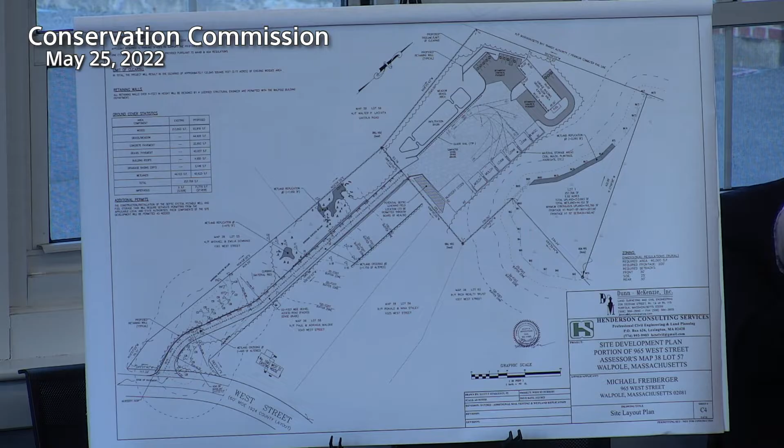We had looked at, as a team, an alternate location, which is a slightly different wetland pocket on the east portion of the site where we aren't really proposing any work. The reason for that was that those grades are much more level. It's easier to be able to lower that grade, but it isn't in the wetland pocket we're altering. And so, as a team over the last week or so and in the coming weeks, we're going to evolve a wetland replication design on the northern end of this second wetland crossing, sort of the shaded area here. This will be extended. We are doing some additional soil testing this Friday, putting in some monitoring wells.

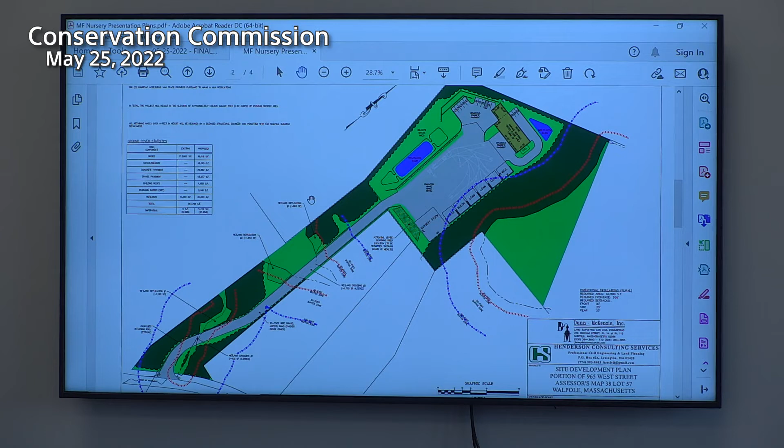It's a unique wetland. Most wetlands are very flat. They collect water. It's sort of the reason that they evolve. This one, there's a unique sort of groundwater breakout occurring to the east of our roadway across an abutting property. And that wetland in and of itself is at about a 5 to 8% grade. So it's a wetland on the side of a hill. Hydrology is a little challenging. We think we figured it out. So that's pretty much all I'll bring up regarding that tonight.

The additional information shown in the plans, things that were either requested under Landis's review or during that first public hearing. We've evolved the erosion control plan. That is sheet C6, I believe, if you want to look at it.

I had a very general site preparation plan. This has some actual sediment basins graded out, shows stockpile areas, a more thorough erosion control line. The following sheet, C7, on that plan set does have details relative to that, actual erosion control specs.

The plans currently do show straw or hay bales. We're going to be changing that to mulch sock, as I hear at the request of the commission, that's your typical request. So that was updated and will be updated on the next plan set.

We have snow storage areas included on the layout in the sheets C5A and 5B, the more detailed grading and utility sheets. We've picked snow storage areas that make sense and that you can viably plow the access road, stockpile that snow, and have it drain as it melts into our stormwater system. So that's on there.

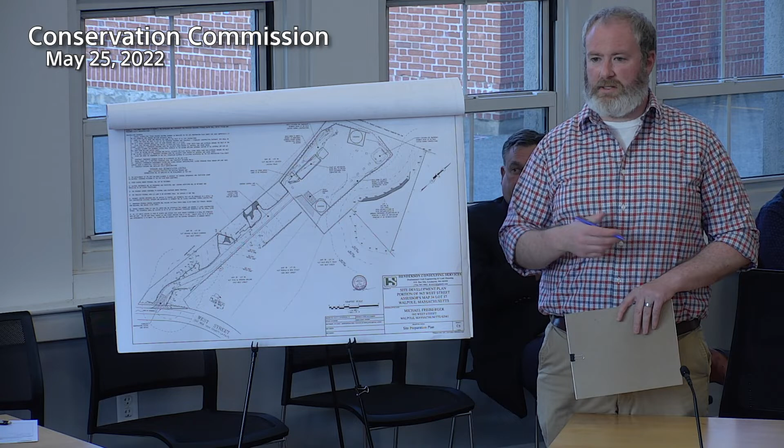At the first hearing, we had done some preliminary soil testing, but nothing extensive that covered every infiltration system. A few weeks ago, I went out with the town engineer, Carl Balduff. We did, I believe, 5 additional test pits. We did in situ percolation tests and hydraulic conductivity tests to support the drainage design. I updated the drainage relative to those. The drainage actually got slightly smaller because the soils were better than what I had assumed in some areas.

Made some adjustments, was able to eliminate one basin. The original plan set had a second one at the northeast corner of the site, off the edge here, but I was able to resize this basin and collect all the runoff into that. So the second basin is no longer there. Allows us to do a little bit less tree clearing, so that was a net benefit. The soil testing info can be found in the existing condition sheet, C3, if anyone's interested in the details of that and the results of those perc tests.

We included a retaining wall specification. So on the plans here, there's a few retaining walls shown, pretty small, all of them non-structural, trying to keep the height at 3 feet or less. But we will be using a large block for those. Redi-Rock is the most common name for that specific block. There's a detail sheet, I believe it's either 9 or 10, that has information for those retaining walls.

Tightened up the limit of clearing line in the tree line. Landis has asked me, on what is hopefully the final set of plans, to put a very clear-cut limit of work line. I will be adding that to the plan. But for reference tonight, where you see the tree line or erosion control line, that's more or less the limit of work. And that's pretty much it. I think those are the crux of most of the updates to the plan.

Yeah, do you want to touch on that quickly? Sure, go ahead. Yeah, so that can be updated. So it's sort of, again, unique. Which drawing is this? C5A, the sheet 5 in the PDF.

So to the bottom of the plan here, to the east of the driveway, you have this second wetland crossing pocket. You'll see the flags start at a stone wall. If you're out on site, there's a very level, clear field off-site to the east here, the rear of these abutting parcels, non-wetland. Wetland's pretty far away, the other pocket. And just at a point at the base of that wall, water perks out. It looks like groundwater breakout, but it's a very unique situation. I've never really seen it before.

That water kind of concentrates in a swale down this hill, and then as that grade starts to get more flat, the water disperses, and it's created that wetland over time. But within the wetland itself, it's on the side of a hill. It's a strange thing. So I had the 4 culverts just in the center of that, knowing the water kind of collects there. We'll go under our new driveway and continue.

Landis brought up a good point that if we could spread that flow out, it's probably more beneficial for the lower end of that BVW, and we're actually going to look at using one of these culverts to feed some of that water into the new replication area. So whereas that same water creates that wetland now, the replication area can benefit from some of that.

So the revised plans will have these 4 barrels spread out, 2 in the middle, 1 off to the side going to our replication area, and the other one just a little bit uphill, so that if there's a significant concentration of water, then that one will flow. So.

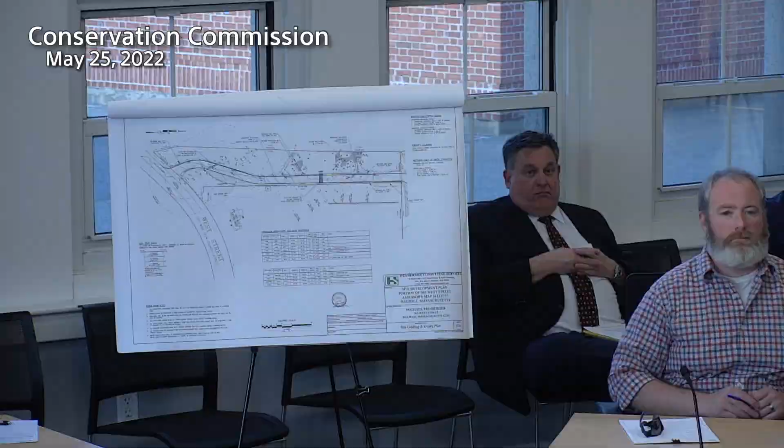Anything else on this? Nope, those are pretty much the comments that I forwarded to the applicant and is in my report. Okay. Dean? No questions. Bailey? No questions.

Doug? One question I have is, in your calculations on the water flows, you have a truck wash area situated right next to the leaching field. Do all the calculations include those? Yeah, so that is a temporary truck washing area. So what will happen in terms of construction sequence, let me get to that plan just so I can.

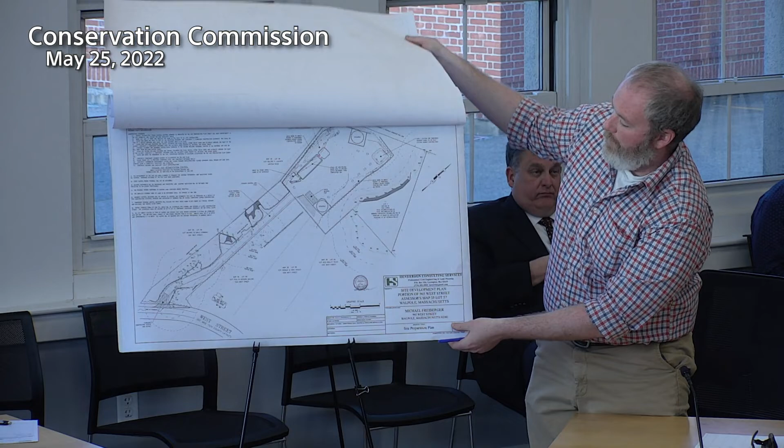That's just during construction? Yeah, so the site preparation plan here, when we start, we're gonna have to start off the road, clear trees, and sort of build this road as a temporary construction road as we go, just to be able to clear and grub trees. So there'll be a truck washing area here temporarily, but once we get to the main upland area, and this is all cleared, this is just when we have trucks that come in bringing material in and out, if we need deliveries of leaching galleys and things like that.

The truck will stage there on the way out, be sprayed down, wash the tires, and then it will drive out so we're not tracking onto West Street. After construction's all done, this goes away, and this just is part of the driveway here. The septic system will be done after that. It's one of the last things we want to do. You don't want much construction equipment meandering around the site.

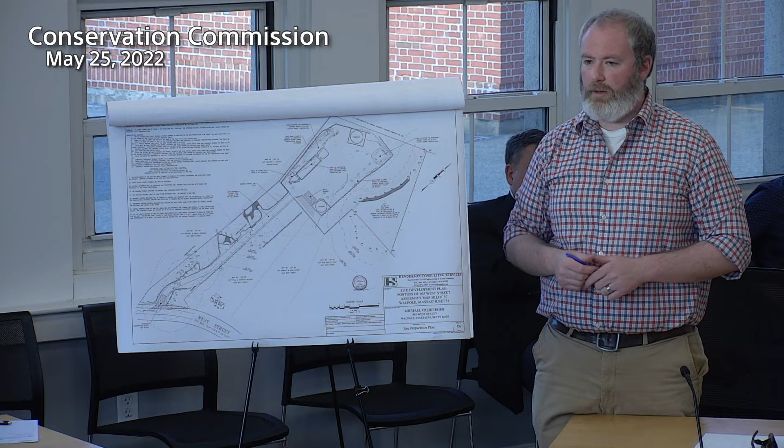And we're going to fence off this leaching area so that it's not compressed or compacted during construction. So, yeah, this is just temporary. And in terms of hydrology, that's just a construction thing. After that, we're only accounting for rainfall with our drainage. So the leaching field should be out of the way of a lot of action, and that's preferred. Okay, thank you. Anything else, Doug? That's it. Okay. Emilio? No questions.

Al? Well, when I look at the layout of the area where you're going to be doing things, I see a building, and then on the end of the building, I see a shape with the label fuel. What's that mean? So there's a chance that Mike may want to have a fuel storage container on site for trucks and equipment that's working on the site, front-end loader, there'll probably be an excavator. If you have trailers coming in to get loaded up with nursery stock and things like that, you're gonna need a skid steer, stuff like that.

If we choose to have fuel on site, we have to go through a state permitting process for that fuel tank, and also go to the fire department. They have oversight into that. I have a general note in the plan that there's several things that will be permits beyond this, that may or may not happen, but we can report back to Landis as those do happen, and one of those may be a fuel storage container. It doesn't mean that Mike is actually gonna do it. It's just keeping a space available for that.

Is that fuel storage tank in the ground or above ground? That would be most likely above ground. Usually I see typically a double wall above ground tank with a storage area. So you have to have a spill containment system designed for that. That's usually a poured concrete slab with some sort of curb, so that if that tank and the second wall of the tank both fail, then if that's discharged, it's stored in that containment area.

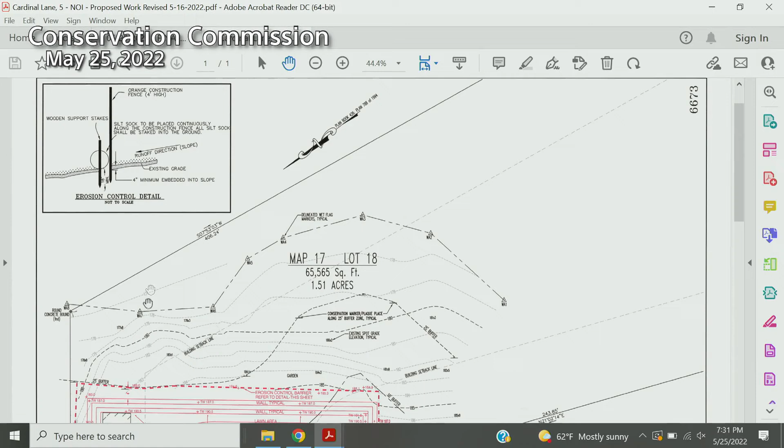Okay, and the hearing's been opened and continued. So representing the applicant? Good evening, everybody. Russ Waldron, Applied Ecological Sciences. At the last meeting, we were asked to provide some additional details on the plan. One being a wall detail and showing the drainage that goes with that. Another being the erosion control, showing an orange construction fence, and additional erosion control around the proposed stockpile area.

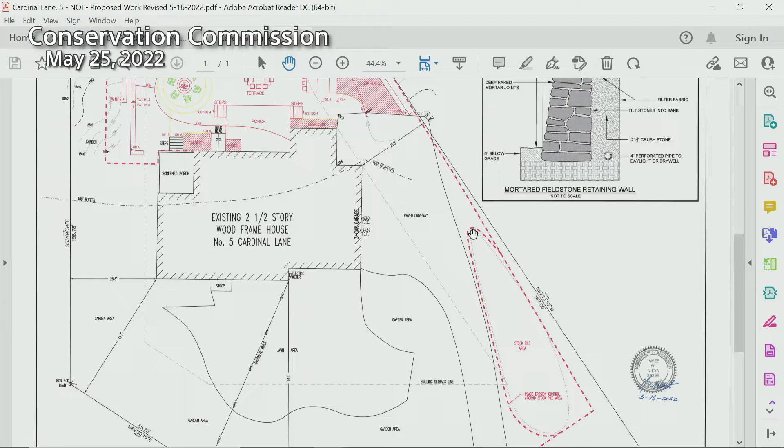There was a question raised as to why the main erosion control came up this far. The guys at Dunn McKenzie put it that way because they figured there's going to be a lot of material brought in to bring the yard up to finished grade. So they wanted to make sure the neighboring property would be protected in case some material gets off one of the trucks, so they'd leave that there as an option, and if they deem it necessary, they can do it.

Let's see, and plaques along the 25-foot buffer zone. Can you see them? Well, they know that's got to be done, but they had a question as far as attaching the plaques. They were thinking pressure-treated posts, or does the commission have a preference on how the plaques get attached? We'll use granite bounds. Concrete or granite bounds? Yeah. All right, good.

All right, so what I'll do is I'll get Jim to position those along the 25, and I'll probably get you that tomorrow or by the end of the week. I do see them on the plan, the plaque locations. Oh, you do? Yeah, your eyes are better than mine. Well, I'm closer to it.

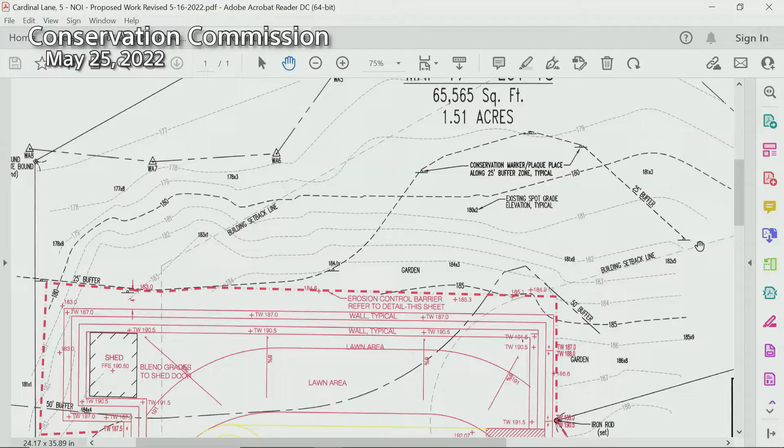It goes from the property line on the, what would that be, the west side? Yeah. Described here, so that's, yeah. And follows that around. Anything else? That was all we were tasked to do. Okay. Landis?

Everything seems fine. I mean, I can send you the spec that we usually send out for the plaques, what we want, like 3x5, environmental plastic or brass. We'll put it in the order too, on bounds. Yeah. My suggested conditions are just that the erosion control be inspected. That's usually in the boilerplate. Erosion control shall remain in place until approved by the conservation agent to remove.

And then I think you had mentioned that the construction of the wall may change, or the material. Yeah, so it's kind of an open question, but in all likelihood, it won't be a field stone wall because of price. Right. So I think what typically the commission likes is, once you decide what you're gonna use, let us know. We've run across some situations where it's supposed to be like an Allen block professional wall, and then it turns into kind of helter-skelter boulders, so we just wanna make sure that the contractor has chosen a way that would be approved by the commission.

And we would bring that to you? Yeah, if the commission agrees, we can just make it a condition that the specs be provided to me prior to construction. Not a problem. Okay. Steve? No questions, thank you. Bailey? No questions. Doug? No questions.

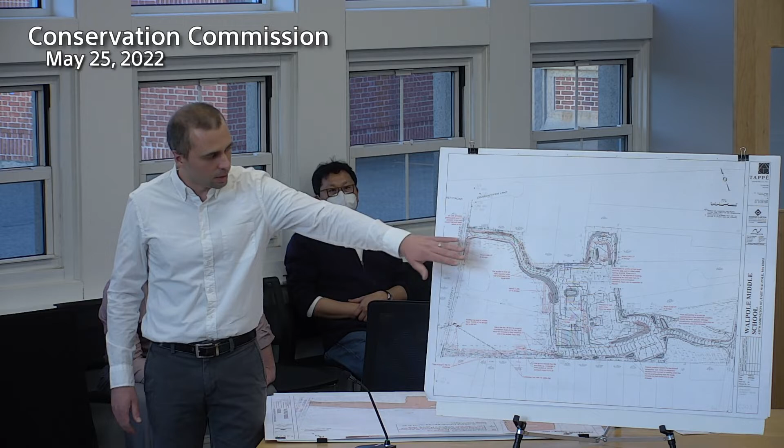I'm sorry, can you just speak more into the microphone so that the recording can be heard? Apologies. So we can demonstrate in that interim condition with the new building built, the existing building still functioning, the driveways providing access to the site, as well as the temporary drives that we're hoping to establish to maintain traffic, we'd be able to manage stormwater and make sure that we're not blowing up what's going on down on East Street and Edwards Drive. We had also sent in a memo and calculations making sure that we weren't impacting that infrastructure too much. And we'll go through that shortly. So just to go through what we think the worst case scenario for the temporary condition is.

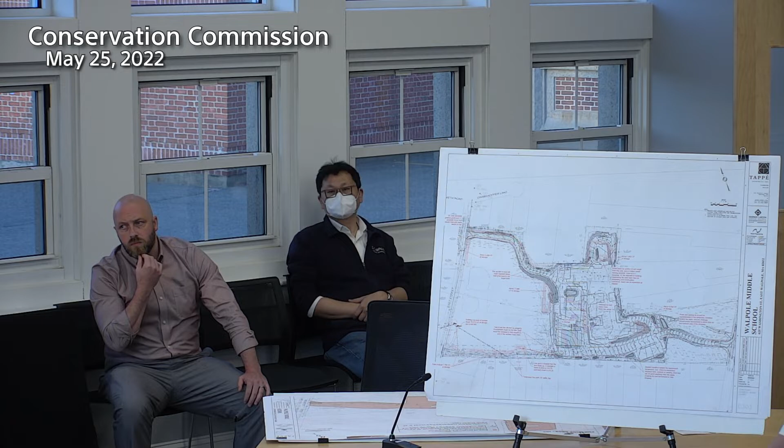Excuse me, what plan is this? This is included as an attachment in the memo for temporary stormwater management. It's online. So there should be a memo that's temporary stormwater management, and this is pretty much after the text. It would be one of the first attachments.

Thank you. All right, so in the worst case scenario and what we're anticipating for a temporary condition, we're going to be constructing pretty much the line of the driveway that's going to be coming in the final portion of the site, and blocking out as much of this area as possible to provide parking to basically replicate what we're replacing in here, or what we're blowing up in there to build the new school building. So this is going to be a temporary parking lot to provide as much parking as we can. We will have this alignment coming down.

It's going to connect to the existing drive and maintain some parking spaces below the existing school here. This is the existing school kind of extending up here, and this is the footprint of where the new school will be. So when we were looking at areas for temporary stormwater management, we wanted to kind of avoid all those and impact access and travel around there to the least extent possible. We really tried to target places that we knew could stay open for stormwater management throughout the process of construction, which largely centered around the field, but there were also some other opportunities in between the building and further up.

So what we're proposing for helping to manage some of the stormwater that's going to be coming in through this driveway is a basin that's basically going in the same spot as one that's going to be there in the permanent condition. It'll be kind of confined to this area just to make sure that we can travel around it, travel around the proposed building, and maintain construction traffic.

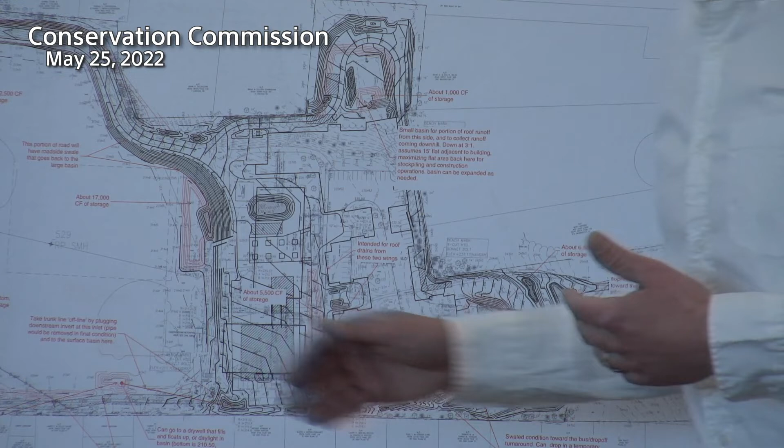And we think there's an opportunity to swale it in the temporary condition around where the building is going to be and connect it into an existing line that would allow us to go underneath and get into the drainage and not go over this parking lot that we're hoping to maintain in that temporary condition. And apologies, there's also going to be a temporary bus loop or a temporary bus road that comes down this way that allows the buses to kind of go through while circulation is impacted on site.

And we're also hoping to construct this, what's going to be eventually permanent, but we're just going to build a temporary condition that's basically gravel. Access path for construction. It will be eventually the driveway. We're not proposing to pave it. It's just going to be gravel in the temporary condition, and it would only be used by construction vehicles. So this is what we're proposing for basically managing everything that's coming down off here for that initial driveway off Washington and the walkway that's going to be there.

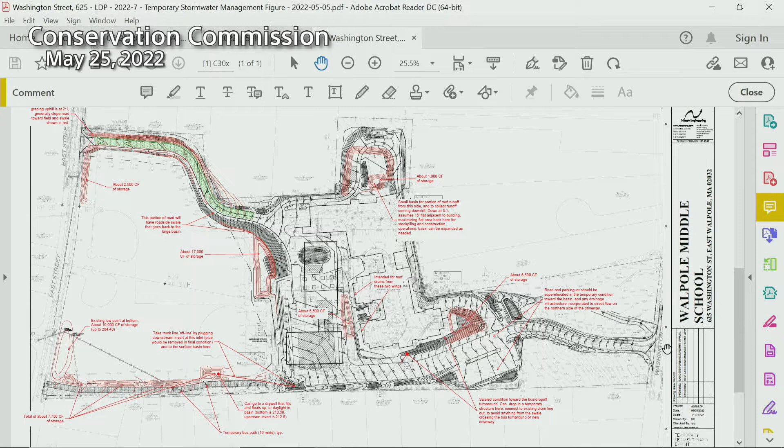For the new building itself, and just to touch on something that's hit on in the memo and just overall, not all these things are going to be happening all at the same time, which is why we wanted to plan for this kind of worst case scenario where everything was built out and we wanted to maintain access on there. We'll be exploring opportunities to do temporary management in other areas as they make sense, be coordinating with the CM and the athletic director around the fields and everyone who's kind of involved here to make sure that we're tackling all the opportunities that we can, but especially in these calculations in this memo, we wanted to show the areas we thought could be open the entire time that would potentially be affected by all these things.

For the new building, there are 4 roof leaders that come off in the proposed condition. There's one that comes off this wing, right here, and then up on that side. This basin that's graded out basically in between the existing building and the proposed building, there's about 40 to 60 feet of space that is available in there. We're gonna have a car turnaround that comes in here, which is why we cut the limit of the basin around there. There'll be a car/bus turnaround that allows for pickup and drop off for circulation that's happening in this temporary condition.

This basin would be intended to pick up the roof leaders that would be installed kind of as part of these. The inverts for these are about 228, 229, and the bottom of this basin is 226. So it would be intended to basically go to a temporary structure, or a structure that's installed right outside there, and daylight it into this basin, provide management for those pieces of the roof, and then eventually, again, overflow into our closed drainage system connection.

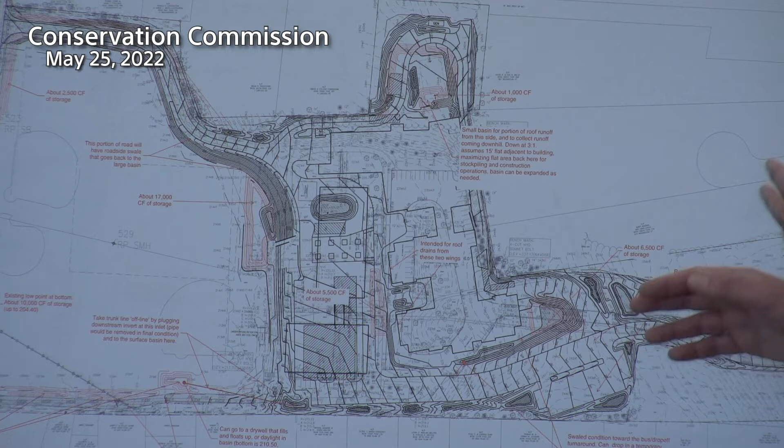We maintained 15 to 20 feet around each building, so there's still flat areas that are adjacent to both. And it's just showing what's possible in that condition to manage the roof water that's coming off on that particular one. And then, other than that, we're pretty squeezed for space on the site itself. We have the existing building here. We have this driveway that's coming through here.

We took these in the available space that was there, but really the best opportunity for temporary stormwater management for the other part of the site is kind of along these fields. So with this bus loop, we pushed it as far south as we could based on the grading, and kind of manufactured as much space as we could between the athletic fields that are here that will be staying functioning and ideally not affected by anything that's going on in the existing, interim or proposed condition.

So we graded out basically a series of stepped basins that's kind of similar to what you see in the proposed condition, where things sheet flow into here and kind of overflow down the chain. That was our intention with what we graded out here. We left a flat area adjacent to the soccer field that is there to not affect it. This is the highest one. It would overflow onto there. This entire, again, stone pathway is going to be graded to flow into these.

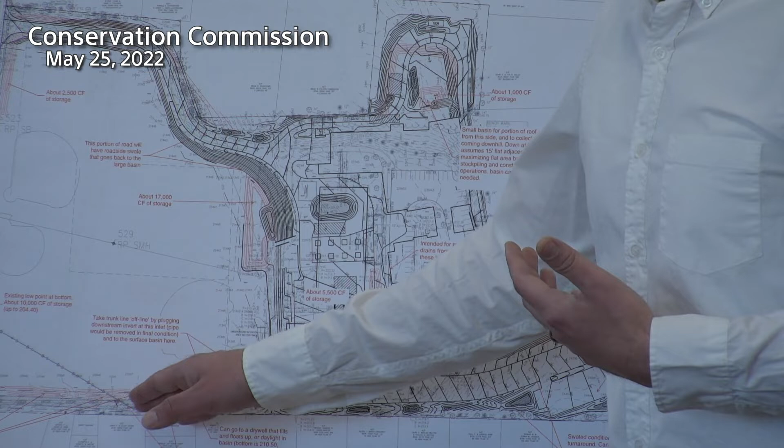So these would be intended as kind of on-site management for runoff that's coming off from these, and eventually draining down to, and you can see this depression that's there, that's existing. That's kind of where all the drainage for the site ends up going before it connects to East Street and Edwards Drive. It fills up at times when the infrastructure in there does get backed up, and that's kind of what the intended function is. So we'd be proposing to utilize that, but really kind of manufacture as much as we could before anything gets down there.

And part of that, I've mentioned the trunk line that kind of goes along the south here that picks up all the drainage for the site. That's going to be true in the existing and mostly in the proposed condition as well. I think there's an opportunity to take that directly offline. So right now, all the drainage on the site kind of goes to the trunk line that's around there and eventually goes that way to Edwards Drive. So at this last catch basin there, the invert is right around 213, 214. And the bottom of this first basin that we've graded there is about 210.

In an interim condition, as long as these basins stay, we think there's an opportunity, because a lot of these pipes are noted as probably asbestos-containing material, they're going to be removed as part of the proposed condition anyway. We can just pipe this water that, again, is collecting really everything on the site, the overflows from here, all the existing drainage structures that are going to remain in the interim condition, and send that to this series of basins, give it the opportunity to infiltrate, not send it directly to East Street and Edwards Drive, and really do as much as it can to get into the ground before it goes into the at times overtaxed infrastructure that is in the roadway there.

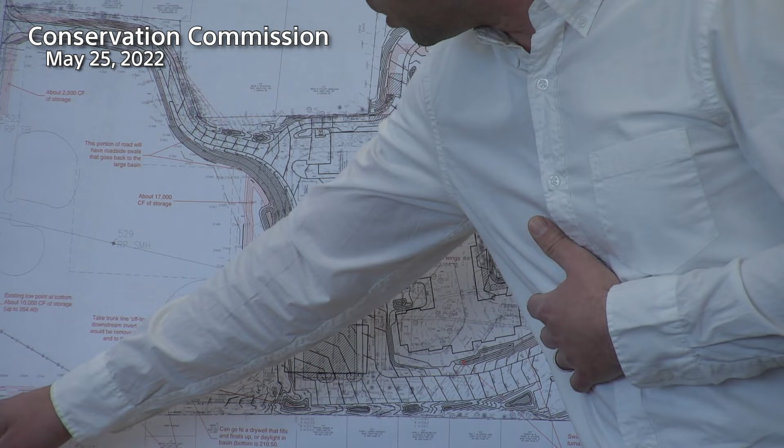We're able to grade out around 7,500 cubic feet of storage in this series of stepped basins there, and up to around 204, 204.5, there's about 10,000 cubic feet of storage available in this down here. So what we were able to get for really everything that's going to be flowing on the southern side of the site is somewhere around 30,000 cubic feet of storage. We're estimating somewhere in the range of 90,000, 94,000 square feet of impervious, this is all detailed in the memo, from this driveway, the parking that's going to be here, what we're leaving there, and these wings of the school that are draining down to there.

So we're able to store right around 3.8 or 4 inches of runoff from that full storm. It's not quite what the 10-year, 24-hour storm is. That's somewhere around 5.35. But I looked back at the historical data for Walpole. There have been 4 or 5 storms with rainfall over 24 hours that exceeded what we're able to get in these various basins for that temporary condition. So that's kind of the definition of a 10-year storm, right? Like, you would expect that if you're looking over the 10-year period.

But I think we were able to grade out and just take advantage of the things that are there to the greatest extent possible to make sure that we're not doing anything that we don't want to the system that's downstream there. And for the northern part of the site, we had some better opportunities, especially in this area, which actually ended up being incorporated into the proposed design.

There is a large area that doesn't affect any of the athletic fields that we're able to grade out for a pretty significant storage. And this would be intended to pick up the roof runoff that's coming over here. It's going to be directed there in the proposed condition, as well as the roof that would be coming off here. There's around 17,000 cubic feet of storage in the basin that is graded there.

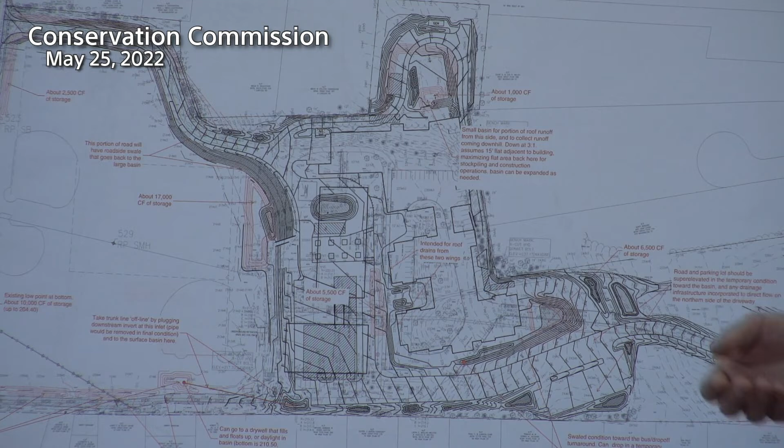There's also a small basin that we would anticipate. The drain that comes out of here is quite a bit lower than the existing grade that is there, so we wanted to just have, for that roof runoff, a small area that would help control it, but it would also flow farther downstream to our larger control basin that we do have there in both the temporary and the proposed condition.

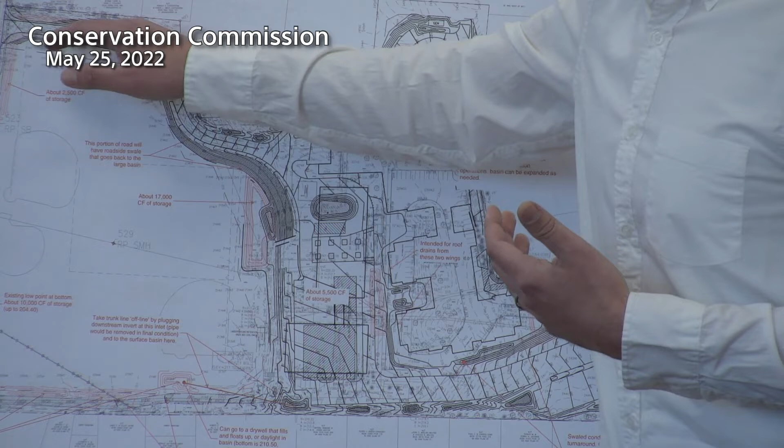And then for this driveway, to make sure that we weren't impacting anything with the athletic fields, we cut back the dimension. It's 24 feet in the existing condition. We're at 18 or 20 feet in the proposed condition, and graded swales that would direct runoff to here, to a temporary basin that would be graded right around there with about 2,500 cubic feet of storage, as well as back to our large workhorse basin for this northern part of the site with that 17,000 cubic feet.

So between a small basin that's graded here for the roof overflow and really anything that's coming off the property into this flat area could be graded into there, as well as the roof areas that'll be going into here and the swaled grading that's getting into there, we were able to get over that 5.35 inch target for the 10-year storm. Somewhere around 5.5, I think, is what was available relative to the impervious that's being directed there between this road, anything that's anticipated in here, as well as the roof that's up there.

And, again, it's gravel. It's not quite impervious, but as it's compacted, it basically acts like impervious. So we wanted to make sure that we were conservative in what we were looking at. It was assumed to be impervious, and we included the storage that was available for that. So that's our plan and overall target for temporary stormwater management on the site. The specific numbers are, again, detailed in that memo.

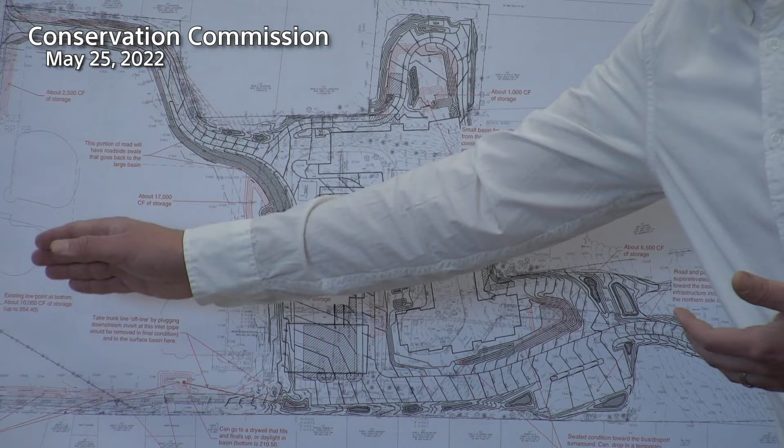But again, not all of this is going to be happening at the same time. We're going to target areas that make sense at every interim condition that's on the site. But I think what we've graded out around here can be the workhorses for what we're trying to do as far as sending everything there, taking this offline and making sure it doesn't go directly into that area, especially in that interim condition when we don't have the full management in, but we have probably more impervious than is being directed in there in the existing. Will really help water infiltrate in as it goes through.

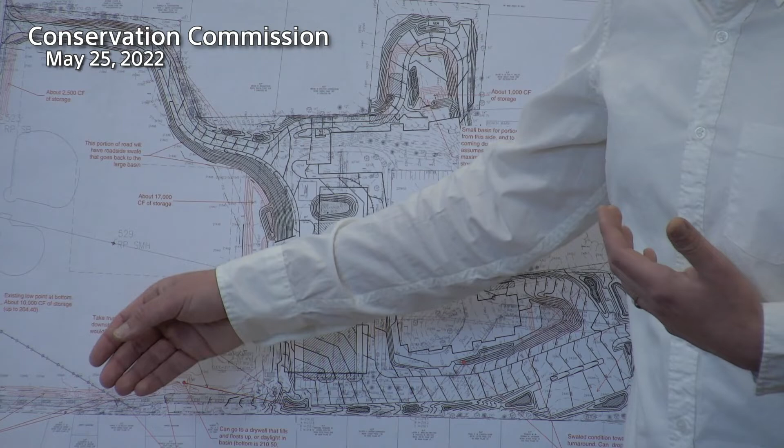And with all the storage we're able to get up here, this basin is intended to overflow down here. It's not shown in this plan, but based on the LiDAR contours we have, we don't have survey in this area, but there's a swaled grading that goes down this way and ends up dumping into this instead of overflowing right into East Street. So the overflow from this would be intended to end up going down that way. So that's how we were thinking about approaching temporary stormwater.

I know, obviously, it's been a big concern for you guys and wanted to make sure that we had it on a plan with our storage targets of what we were thinking, and really for the worst case scenario where this whole building is built, this driveway is built, this connection remains, we're doing all our parking here, this is built, and this remains active. It's not going to be the case throughout, but I think that is the worst case scenario that we do want to plan for, and planning for that lets us piecemeal as these things come through and install what needs to be installed for these particular areas as we're moving through that.

So are there any questions on temporary stormwater management? Landis?

Sorry, I would just bring up, so we don't have Beta here tonight, but they did a second report where a lot of these issues were addressed, and one of them was the temporary storage during construction. And they just recommend that a condition requiring a final interim condition plan or plans be provided to and approved by the commission prior to the start of each phase of the work.

So that could be conditioned. You have a lot of possibilities here. You really thought out hard, and I commend you at that, because that's what we're always pushing applicants to do. So that's great. So maybe before each of the different phases that you're working on, you just kind of submit something to the commission where you know a little better of what you need to do. So that's something that the commission could condition, and that they'd also recommended.

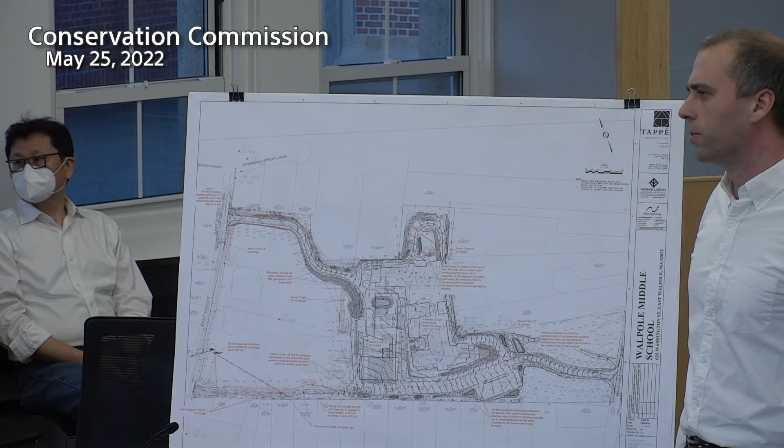It'll flow downstream to the next. And these are generally graded maybe a foot or two below existing grade, so they're not really going too deep relative to what's out there. We are kind of pinched, so that's what we need to do, but it means we're not really going much deeper than ground surface, so there's less of a chance that we would encounter groundwater. We're not even going 3 or 4 feet down, it's a foot or two below existing. Okay, thank you.

No other questions? I do have a question. You talk a lot about the 10-year storm, and I'm guessing that that's based on the assumption that a lot of the impervious surfaces of the existing school will not be there in the future, and that changes the math. It does. It's also specifically written into your bylaw that in the temporary condition, we need to manage the 10-year storm overflow, which is why I'm focusing so much on that. But obviously, it will handle all the smaller scale storms.

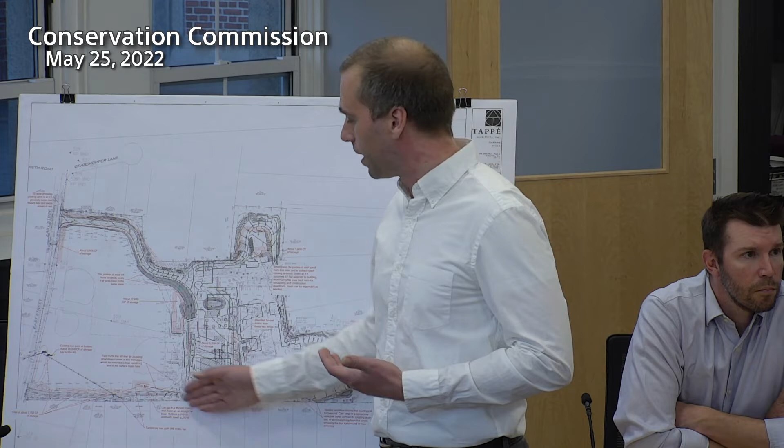As you're getting into the extreme storms, yes, it will overflow. That would also happen in the existing condition, right? We do know that there is some ponding going on there. But that's why, at your direction and in general, we want to have this extra storage and take this kind of thing offline. So in those extreme storms, we're doing as much as we can. We might still expect some flooding down at the end there, and we might have more impervious. But ideally, we're demonstrating that it's an improved condition relative to what there would be.

But do we need to design for a bigger storm, given the possibility that the town elects not to take down the old building, and the site 40, 50 years from now still has all this extra impervious? So the 10-year is just for the during-construction management of the interim stormwater condition. In the proposed condition, we're required by Mass DEP standards as well as yours to make sure that for the 2, 10, 25, and 100, we're not increasing runoff on the site.

And in our resubmitted report, we're demonstrating a pretty significant decrease. I think it's somewhere around 34 cubic feet per second for the flow coming off the site in the existing. We're down to about 29 in the 100-year storm, the most extreme event. So we're providing additional management despite increasing the impervious by about 3.5 acres.

Okay. All right. Anything else, Doug? No, that's it. Media? No questions. I do agree with Landis, with the suggestion regarding coming back to us with the phases, but that's all I've got. Al? Well, first of all, how long a period of time do you expect this project to take?

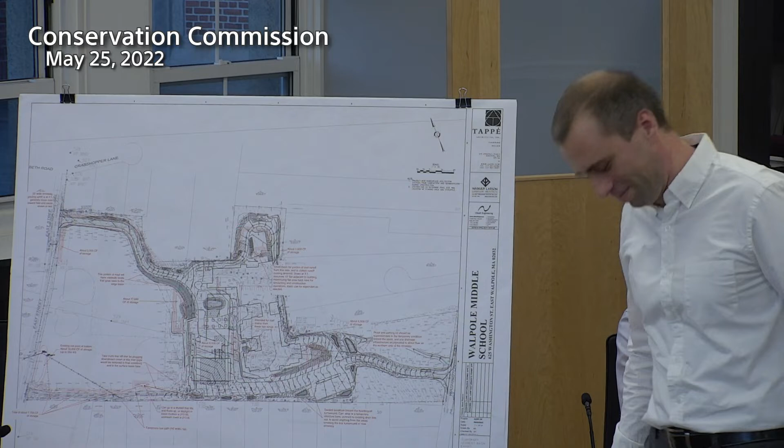Joel? Hi, I'm Joel Kent. Yeah, speak into the... Yes. Thank you. My name's Joel Kent, I'm the construction manager.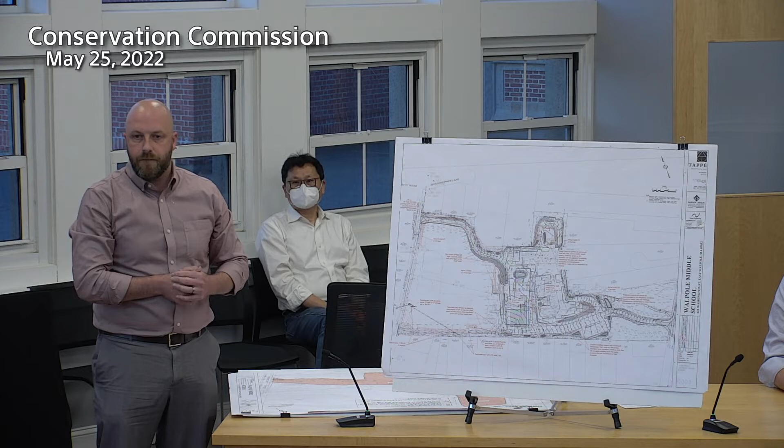So the project currently is scheduled for an opening in August 2024. The demolition phase of the project would take place after the new building's occupied. So demolition would wrap up. We'd try and have the site in as finished a condition by about Thanksgiving 2024. And then the current schedule has a return in spring 2025 to do any kind of touch-up work, landscaping and things like that. So that looks like probably 3 years that it's going to take to get this done.

Okay, now, it looks like you're gambling that we won't have anything more than a 10-year storm in a 3-year period of time. And I don't think that's satisfactory. I think we have to have a little more of this holding back of the water on the site rather than releasing it all, because when it reaches 10-year storm, you're not going to take responsibility. That doesn't go with me. I've seen too many cases where things didn't work the way the engineers thought it would, and it exceeds the 10-year storm.

And we seem to have more storms larger than 10 years at the present time with this global change of climate and all. Regardless of who's to blame for all of that, that's got nothing to do with it. It's changing, and we have to accept the fact that it's changing and plan accordingly. So I'm not satisfied that a 10-year storm is what we should be looking at here. As I said at the last meeting, I would hate to see all this water cross East Street and flood the houses on the other side of East Street. They're not currently flooded, so I don't want to see that the town is responsible for that happening.

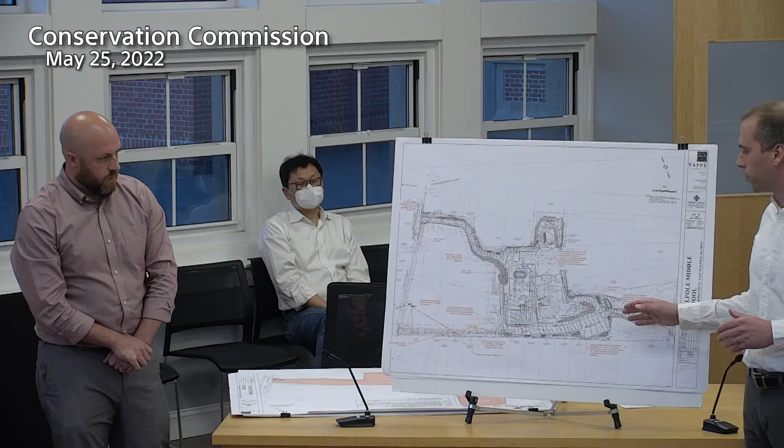Sure, and understood on all your concerns. One thing I would add for context on the 10-year storm, it would be up to that 4 inches of rainfall on the impervious on the site that we would expect absolutely no outflow, not assuming anything for exfiltration, not managing the 10-year storm, or at least for this southern part, managing the 4-inch storm. There would be no outflow from these basins up until that 4-inch storm.

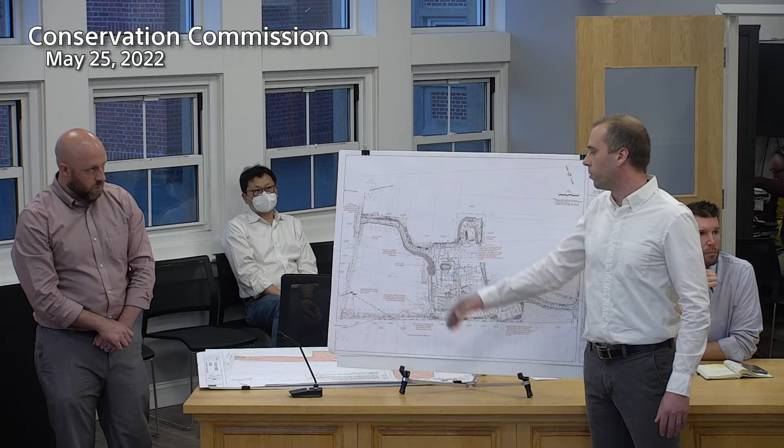Once you get past that, you would expect outflow to leave the site, but with the storage that is provided up until 4-inch rainfall, you wouldn't see flow off of the site. That would be the intention of the basins and the stormwater management that we're showing here. So understanding your concerns, I just wanted to add context on that 10-year number. The intention would be no outflow up until that 4-inch storm for this side, and then up here, we're holding the full 5.35 before any flow does come off the site.

Well, we have in a neighboring town a hospital that is out of business because of flooding. And for years, engineers kept saying that the drainage is sufficient to handle it. And all of a sudden, we have a storm, it fills up the basement of the hospital and wipes it out. Okay, now, it could have been foreseen that it's possible to have more than a 10-inch storm here in New England. So, as I say, I'm not happy when I look at the minimal amount of storage you have proposed. I think we need more, so that's my opinion.

But I'm in favor of seeing the project go forward, but I want to see it go forward and have less problems than we've had with other town projects in the recent past. So I want somebody to go back over this, and I think we need to think of more than a 10-inch storm. 10-year, you mean? A 10-year storm, excuse me. Okay.

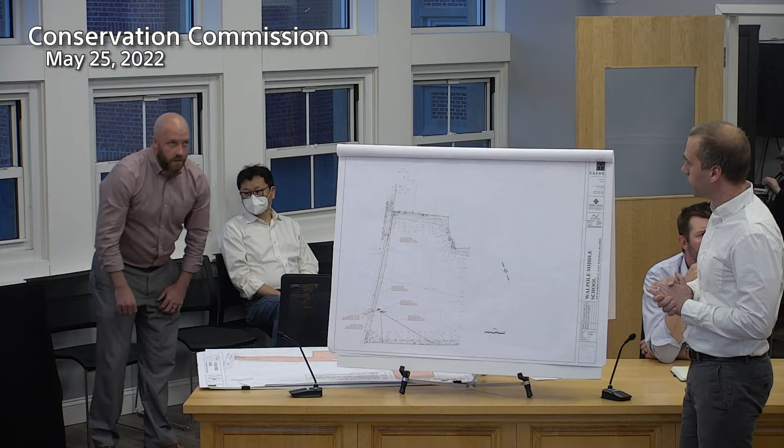All right, so this is just a plan to kind of guide the memo that was written up, again, at the request of the commission, town engineer, and the reviewing engineer, to analyze the capacity of the drain main that's in East Street and extending down to Edwards Drive. So yes, when we submitted this last week, the survey field work was actually taking place that day.

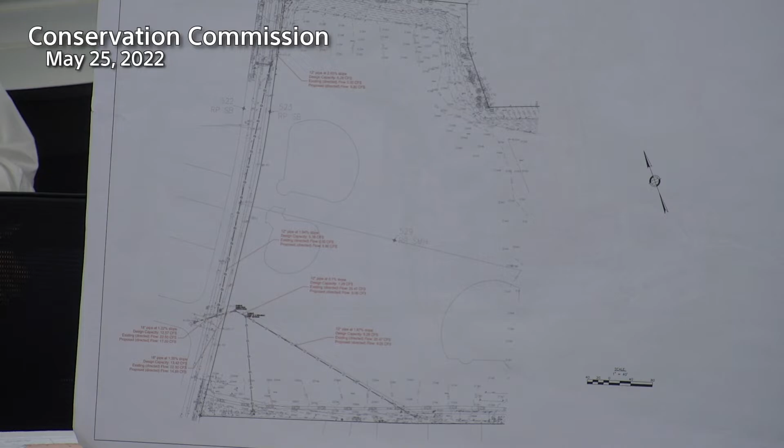So the model that we put together was based on record plans that were provided by Carl, and they had gone out and shot a couple additional inverts as well, while they were trying to investigate and uncover a couple of buried structures that were on the site here, particularly one that's right around there, as well as a buried manhole that was around there. So we used that information as well as record plans that the town had already provided to build the model and kind of test what we thought the capacity was in here and whether we were pushing it.

Particularly, obviously the main connection for the site comes down on this side, and as Landis had mentioned, these are two 12-inch pipes that kind of extend out to there. Definitely under capacity, which is what's kind of demonstrated in the memo when it switches from, I think it's 14 or 15 inch in the existing condition at this manhole and goes down there.

So we're putting the new connection in up here as far as stormwater leaving the site near that driveway with the management that's kind of happening up there, which obviously is not happening in the existing condition. Everything's kind of coming down here and going down Edwards Drive.

And throughout this process, because obviously we've been talking to the town, getting record plans and getting their input on this, we've heard that capacity down there is a problem, and it's something that we wanted to be aware of, obviously, with everything that we're doing here.

So this plan that's included as part of that memo shows, based on these investigations, size of the pipe, what the slope is, what the design capacity is, what's going there in the existing, and what's going there in the proposed. So this trunk line that's I believe 12-inch, might be 10-inch. Again, it's something that we're trying to verify. Has a flow capacity of around 5 or 6 cubic feet per second.

What we're proposing in the design that was submitted is connecting up here. It's right around what that capacity is. So, because we know that there's drainage coming up from this side, we did build in a couple of safeguards to prevent anything from our site from kind of overtopping that, and I'll go through that when I pull up the utility plan.

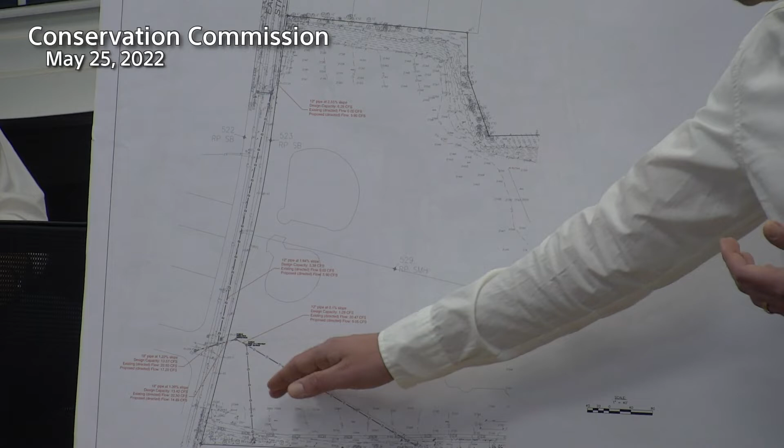And this pipe, also 12 inches, bit more slope, but again, not enough to pass in either the existing or the proposed. We are demonstrating a reduction in the proposed, but a 12-inch pipe really doesn't have a lot of capacity at those slopes. So they are definitely undersized in both conditions.

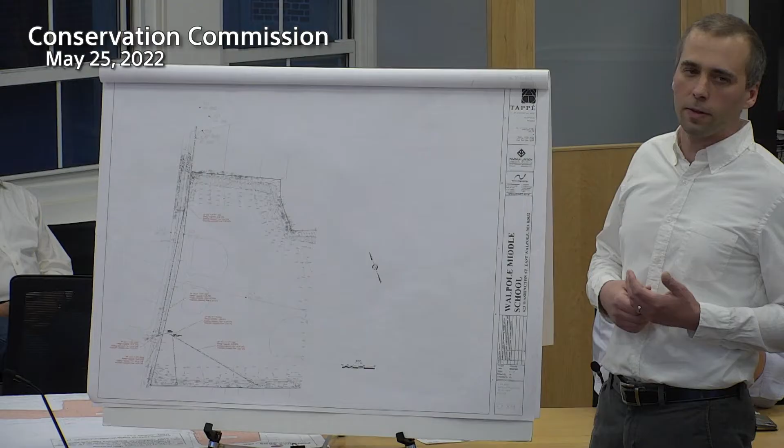Then, knowing that we're reducing that, we kind of submitted that in the memo, saying, especially the larger stuff that's downstream, going down at Edwards, we're improving the conditions significantly. We're pretty much right at where that capacity is for those 18-inch pipes that are downstream, and have a couple other ideas to make sure that we're not overtaxing, especially East Street, and potentially where that connection is for Edwards. So let me see.

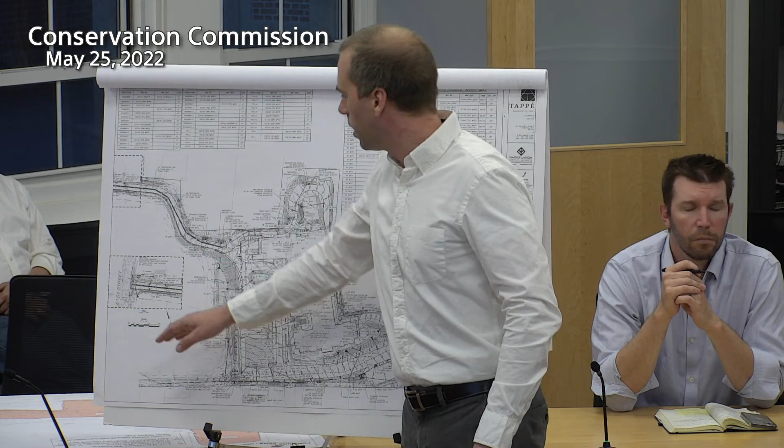Yeah, okay, right here. So this little inset includes where our connection is. Sorry, let me go back. With this larger basin that we have here, there's drainage that's coming up from the roof area here, as well as overflow coming from these basins, and then really this entire road. We have management that's in place for all of those. We have underground basins, we have surface basins, everything kind of ringing the road here, and then these pipes themselves are perforated pipe. But we're directing a lot of flow that's going to East Street that wasn't there previously.

So with this basin expanded, that's the one that you saw in that temporary plan. It's something that we're incorporating in the proposed plan as well. We put in what I like to call basically a diversion manhole. So this pipe that's coming out here and now dumping into this basin, it's lower than the 24-inch pipe that's continuing out that way by about half a foot.

So any flow, especially in lower flow conditions, and even in higher flow conditions, is going to be picked up by that. Everything that's coming up through here and is essentially about half a foot lower than what's going on down here is going to be directed into this basin, which will eventually overflow this way and follow grading kind of out that way.

So we're taking a lot of flow offline from what would be directed towards here, and built in one more safeguard just to make sure that if East Street is full, flow would be able to leave our site and not overtax that. It's a little bit difficult to see, and I apologize for how small the inset is. There's really just a pipe with a flared end section.

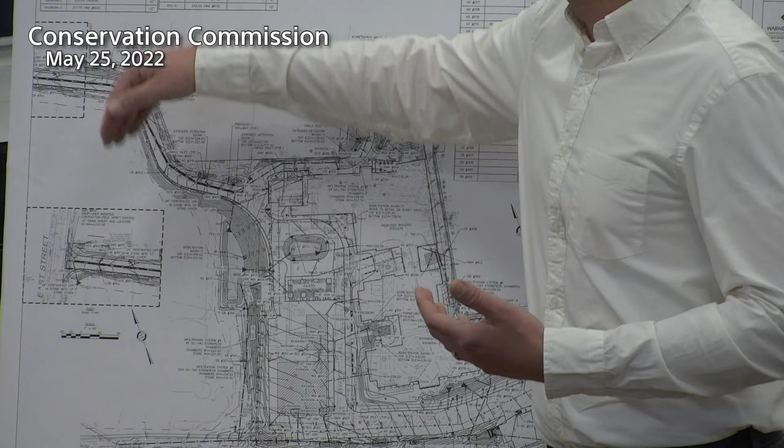We set the invert of the pipe leaving that manhole pretty much at the crown elevation, so the top of the main that's in East Street. So as soon as that fills up and water is no longer leaving the manhole, it's building back up on our site, it will flow out through that pipe to a little flared end section that'll dump again on that slight swale condition that extends down through there.

So if East Street is full, whether from a combination of our drainage, especially at this upper level, or someone else's, anything that's excess will be directed back onto our site, onto green area, encouraged to infiltrate, and eventually get down to that small little basin that rings the outlet right by East Street and Edwards Drive.

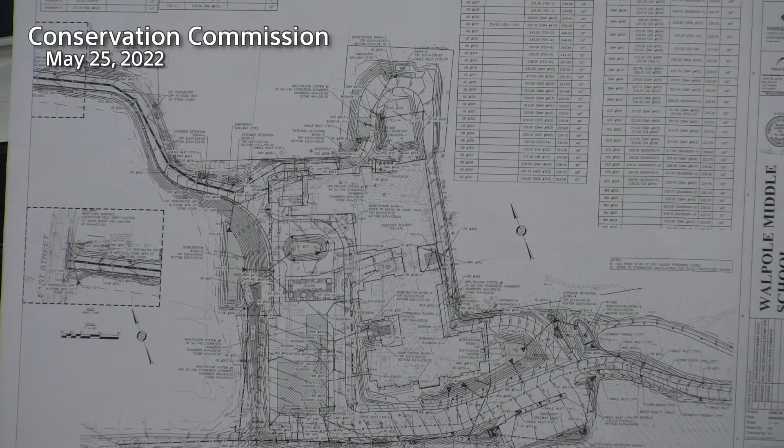And if I could just add for the commissioners, I did provide in your packet the memo called Existing Drainage Infrastructure. We have the picture of the little inset. Oh, yeah.

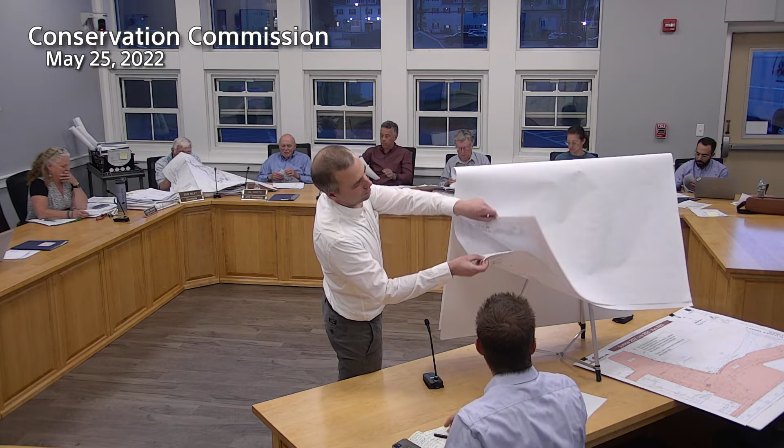So, with an eye on not wanting to direct any additional flow to that 12-inch that I'll flip back to, right here, we built in a couple safeguards in the final design of the site. First, directing initial flow to our larger basin that we created out here, and then providing an extra outlet. Should this become full, even with the reduced flow that's coming off of our site, it would also have a place to, again, dump back onto our site, roll over grass, be encouraged to infiltrate, and not flood the infrastructure that's in East Street.

So with these particular ones, it is something that we want to look at. We either want to replace these or look at some other potential solutions. Maybe there would be a swale that comes in with its final condition that we can daylight some of the drainage to, so we don't need to replace all the pipe as it goes down there. Or we upgrade the pipe to manage capacity in these really small and flat pipes that are being provided there.

But overall, our analysis showed we're reducing flow pretty significantly in the proposed condition. The existing condition does have more flow and is over the capacity of the pipes that are downstream. The proposed flow that's going there is about right at the capacity in that 50-year extreme storm. Obviously, we're going to maintain this overflow area, so it'll still be there if the infrastructure does end up being overtaxed, as a safeguard for rainfall that's leaving the site to pond, again, be encouraged to infiltrate before it gets back into the catch basins and flows out.

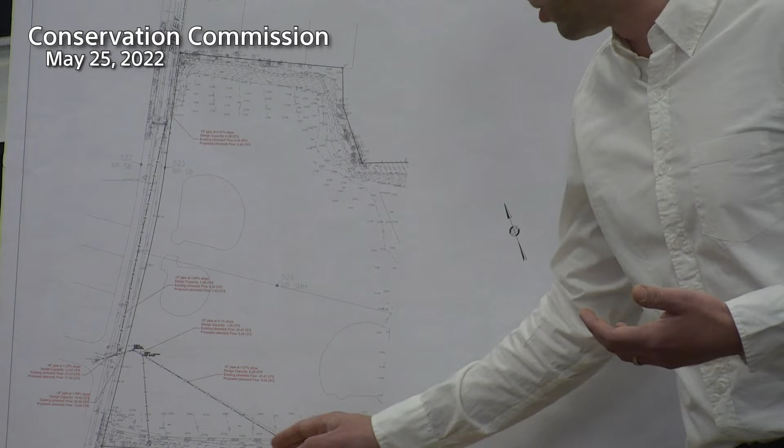But with what we're doing to take flow offline up here, reducing flow that's coming off here, and then looking at solutions to either upgrade the capacity here or, similar to what we're thinking about for temporary management, just take that flow offline and maybe dump to a swale that's graded along there, so we don't have to worry about under-capacity pipes that are on our site. It'll just all naturally flow to where it does in the existing condition. It'll pond up, flow out, and go out the same way, but we can eliminate 600 or 700 feet of pipe and encourage it to infiltrate.

So that's the overall view of how we were thinking about approaching it, making sure that we weren't overtaxing it, and what we want to do to make sure that, especially in these cases, where we do still have to use these pipes, we will have a solution that gets us the capacity to actually send the flow that we want off the site in both the existing and the proposed condition.

And this is just for really, really strong storms, right? Yes. Worst case scenario is what you're really planning for. Yes. So in the smaller storms, your 2- to 10-year, lower intensity, 3 to 4 to 5 inches, those will be able to pass the flows that are coming from the site.

They're not as significant, but we want to plan for those 25, 50 high intensity storms, especially when we're doing drainage, because that's when you get those flooding conditions or water coming back up through catch basins, and we want to avoid that with anything that we're sending off here.

So Beta did, in SW10 and SW11, discuss the survey, and should the existing condition survey and questions be completed prior to the permit issuance. Again, the commission could condition the permit so that the survey be submitted upon completion prior to the construction, with the analysis demonstrating that the two 12-inch pipes on Bird Middle School and the 18-inch RCP to the west of Edwards Drive are adequate to convey the flows without flooding, or provide the commission with revisions, if need be, of plans that adequately address the issue. So once they get more information, if it needs to be revised, then it needs to be revised, and they need to submit it to the commission.

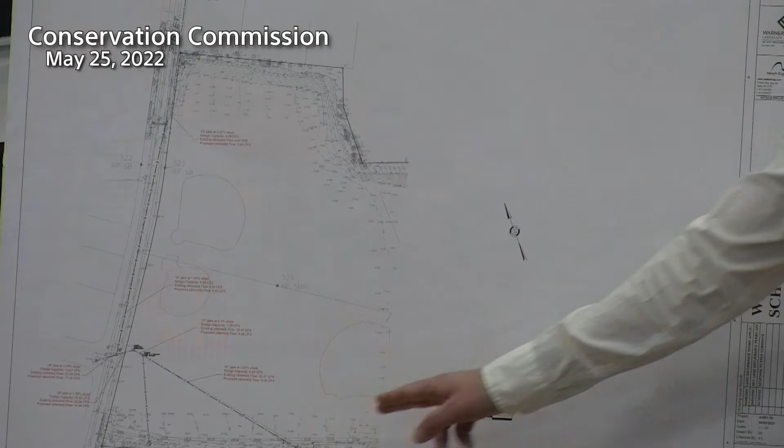So more than likely something should be done even if it's in pristine condition, because 12-inch just cannot really pass the flows that are coming from this site in any condition with the impervious that's there. So yeah, we absolutely can do that, and we do have video for this stretch. Couldn't get in that stretch. Excuse me, you're saying that that pipe is inadequate? This existing pipe? Yes. And what is the plan to do anything about that?

So we'd be anticipating replacing it with a higher diameter pipe that could pass that. These things have now just been added to the survey, so we can update the design plans that would do that. We just basically did this from record plans, so we would have the analysis to present you there. They were going out on the day we submitted this to actually incorporate them into the survey. So the design would need to be updated to show pipes that do have that capacity, as well as added to the pipe capacity model that's included as an appendix in the stormwater report. So those calculations do need to be updated.

We were thinking a potential solution would be to upgrade the diameter of those to the point where it could actually pass those flows, or pursue something with a potential grading solution. Maybe put a small swale that extended down to there and just pick up the pipe a little bit further upstream and daylight it into something that's overland, and then just not worry about pipe capacity or not have to replace these that are further downstream. We just need to worry about swale capacity. Again, improving stormwater condition that's on the site, and then not having to reinstall 600 or 700 linear feet of pipe in that higher capacity that could just send it right off the site. There might be a more green infrastructure solution, with the inverts that we do have out there.

So you're saying that one or the other of what you just described would be done? Yes. Okay. You said that's asbestos pipe? To my knowledge, everything on the site is, based on the record plans that we have.

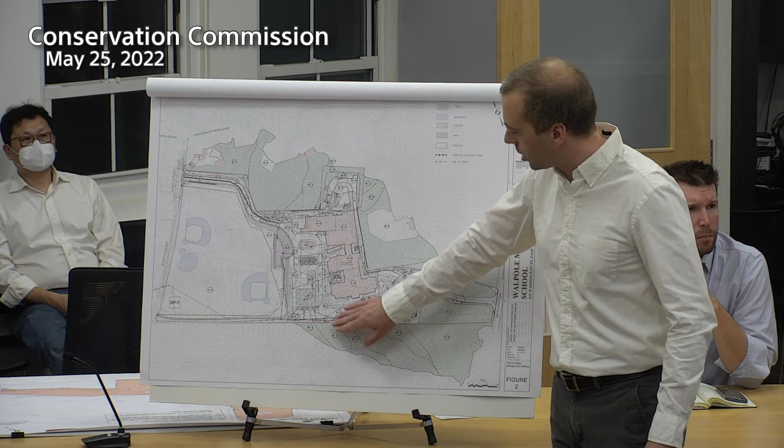It's being picked off from this basin and directed to a larger infiltration area there to provide even more recharge and reduce the quantity of stormwater that's coming off the site before it eventually, in this design, connects back into here and goes down that pipe and off the site. The roof areas are proposed to be managed by these.

Well, can I interrupt you for a second? Sorry. Can you just go over, I know our regulations require a foot of freeboard for the extended basins, which you're not meeting, so there's a waiver requirement. I know Beta reviewed that and is pretty comfortable with it, but can you explain that a little bit so the commissioners understand? Sure. So the freeboard requirement that's written into the bylaws and the way that we discussed it and interpreted with Beta

It's a foot between where the top of the storage is for any of these defined surface basins and where the emergency spillway is. So flow in larger storms that's coming off, there needs to be a foot of separation between those to make sure that we're not having any conditions where things spill over outside of the basins, causing erosive conditions. In almost all of these, there is also a lower flow area drain overflow that will pick up flow in those smaller storms and send it out. The intention for the emergency spillway is really only to be used in the 25 to 100-year storms in those extreme conditions.

In accordance with Beta's letter, anything as far as these basins that specifically dumps into a parking lot, so this basin and anything that picks up, I believe, really off pavement, was regraded and remodeled to make sure that we did have that 1 foot of freeboard. I think there were maybe 6 remaining basins that aren't dumping onto pavement, but we had requested a waiver for providing that 1 foot of freeboard. We provided the table that would have been in the Beta response letter.

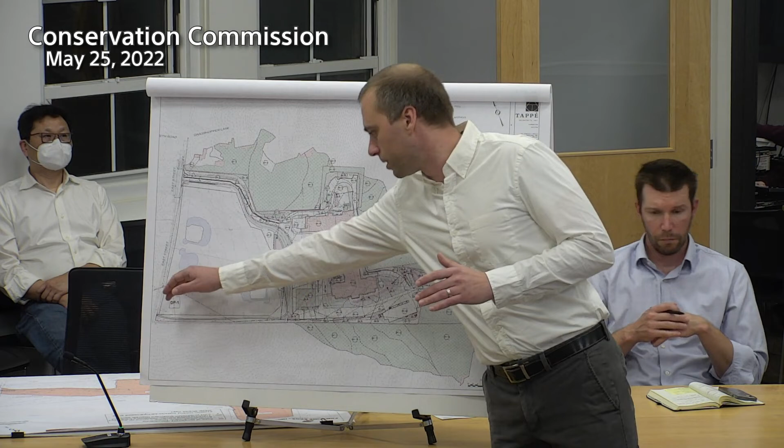So it's providing that management in place just with the infrastructure we would need to install no matter what, which is those catch basins, the drain main that collects everything, in an area where we're most pinched for being able to do surface basins on site. So that's basically it. Again, the whole intention was to send everything downstream to something else before it eventually dumps to a grass area and ends up down there. So, trying to make sure there were multiple levels for everything that we were doing here as far as stormwater.

And Beta reviewed the hydraulic calculations, and Carl looked them over. Also, they have a series of sediment forebays that Beta was comfortable with. There's, I think, water quality units throughout the site as well, that both Beta and Carl were comfortable with. They were reviewed. And from a pre-treatment standpoint, the biggest change that we had made, for the curb breaks that end up flowing to these, there's just a change in structure to something that Beta had discussed and recommended. It's sort of like a catch basin, where water's going to flow through into a grate with a sump beneath it that's easier to clean. Carl is more comfortable with it from a maintenance standpoint, rather than a curb break that flows out through there.

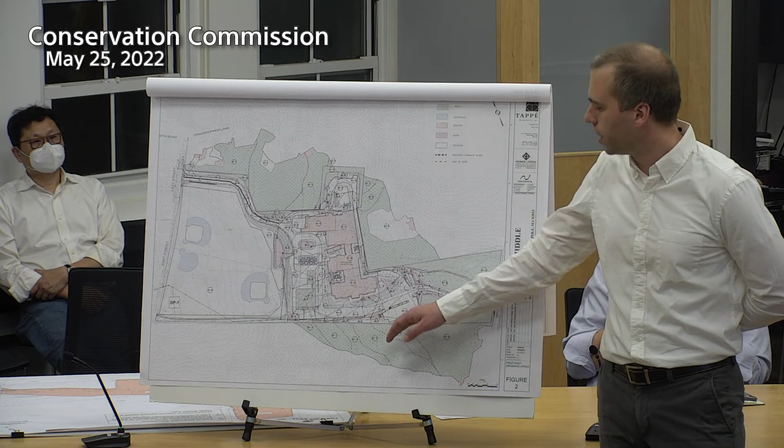It would basically just be incorporated as part of the curb breaks that are being proposed there. I think it was maybe about 15 locations throughout the site that we were proposing it. From a pre-treatment standpoint, based on our discussions with Beta, that in and of itself, based on testing they provided to us, was somewhere around 65% TSS. I think we used 50 in the calculations that we submitted, but very good removal of suspended solids and easier to maintain relative to stone diaphragm, which had come up as a maintenance issue both here and in the peer review letter previously.

Right, so Beta and Carl and I were also just concerned with the operation and maintenance plan and the town's ability to maintain all the different structures. This is a little unusual from the other sites around town, that there's multiple different BMPs spread out through the whole entire site, some bioretention areas, some infiltration, extended basins, sediment forebays, a lot of different stuff, which we want to make sure that DPW and the town is able to handle.

So one of the conditions that Beta put in was that DPW approve the final O&M plan. What I would like to do, and this would go hand in hand with the MS4 permit, which the town is supposed to get sort of annual training, is to do a workshop with the DPW in regards to maintenance of bioretention areas and porous pavement and some of these different BMPs that are being integrated into this site.

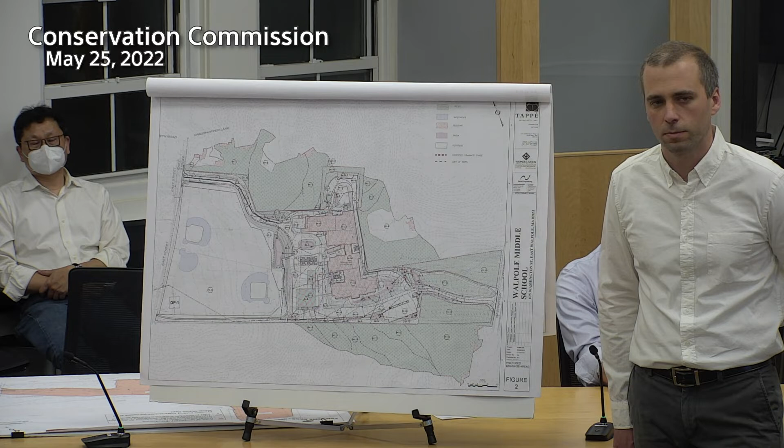Who provides that training? We would set it up with the consultant that we've been using on the MS4 stuff. Just to kind of refresh or help train people in what you do with these different BMPs, which can be very effective, but they're different. Yeah. They're not always just mowing a depression in the ground, so.

Okay, anything else you have? Not unless you have questions for me. I know I've talked through plenty of times. There's a lot of information. Wanted to make sure I hit those two issues pretty hard and walk you through the memo, I know there were about 10 attachments in what we sent back, in case you didn't have a chance to read through the memo, give you the background on what we were looking at and considering to address those issues.

Lance, do you have anything else you want to say? No, I would just acknowledge that there's a lot of information that's been submitted between the applicant and Beta that's gone through to the commission tonight. So I understand it's a lot to digest. Information comes to my department. I think we've had it since May 20th. So if any commissioners want stuff, they can always let me know, and we will get them to it.

But I've looked at this stuff, Beta's looked at this stuff, Carl's looked at this stuff. As far as in-house, I think this project has been pretty well reviewed compared to other past projects, I would say. Okay. Dean, anything? No questions. Good job. Bailey? Same, nothing, excellent job. Doug, anything else? No. Media? Also. Al? No. Okay.